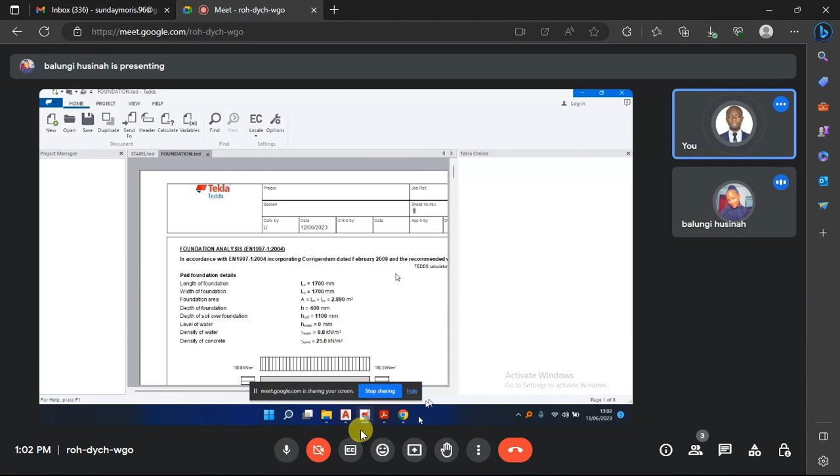It was 1.7 by 1.7 by 400, right? Yes. So we are going to see how we can sketch it and the important aspects when you're sketching it. Okay, I'm going to share here and you see my screen.

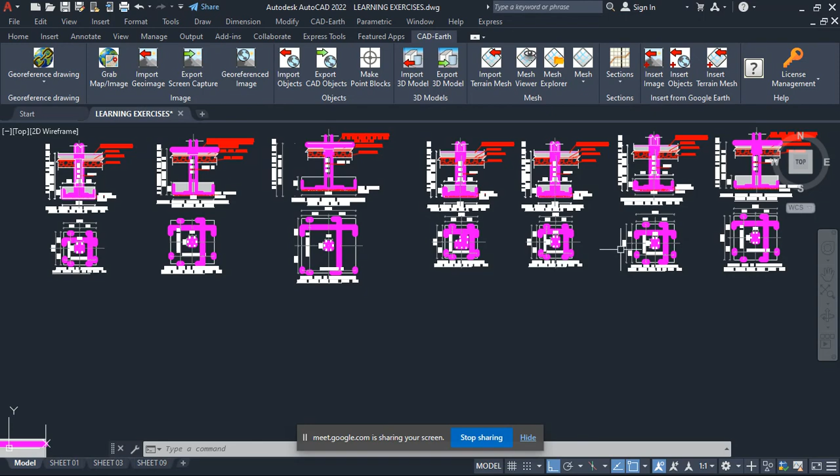Now when we are sketching a pad footing, of course you have to show the plan. For this case, I think I had a 1.6 by 1.6, I don't remember. Let me use this one. You need to have a plan, this is like length and width.

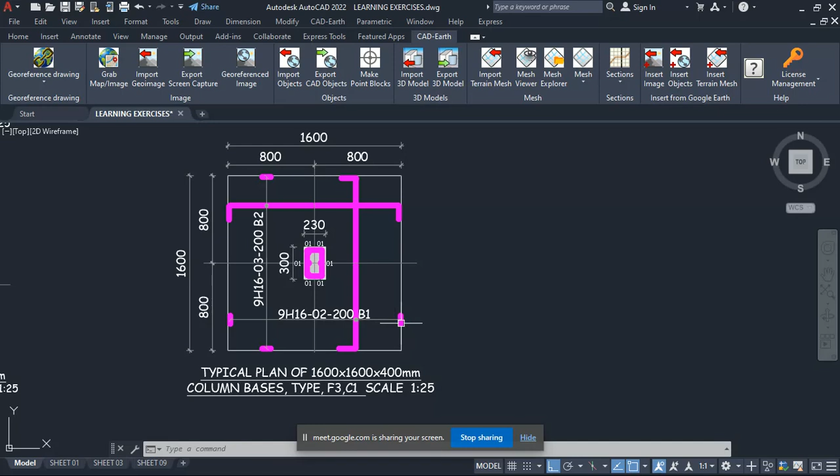So you need to show the main bars. The main bars are mainly the ones which are bottommost, that is B1. Now ours was showing T12 at 175, right? Yes, but mine I have T16 at 200. So T16 at 200 is more stronger than T12 at 175, right?

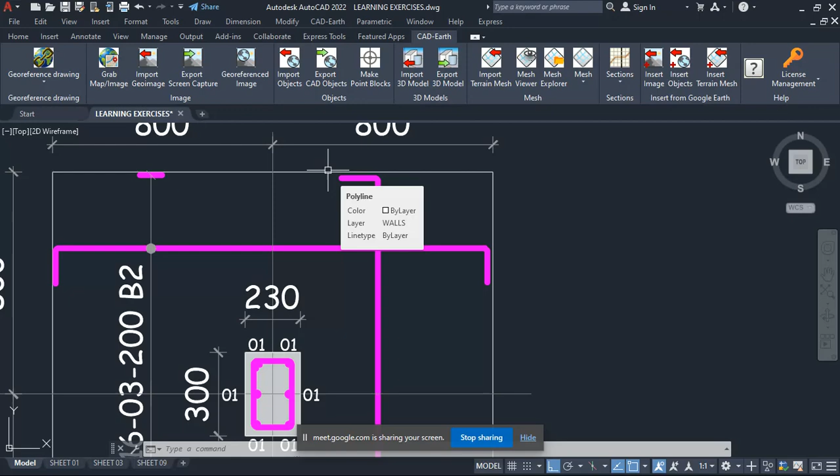Yeah, then another important thing is the hook. Now the hook should be at least half the thickness of the base. At least. So if your base is 400, at least it should be 200. This distance here, I don't know, sometimes I just sketch far, but it should be at least 200. At least half.

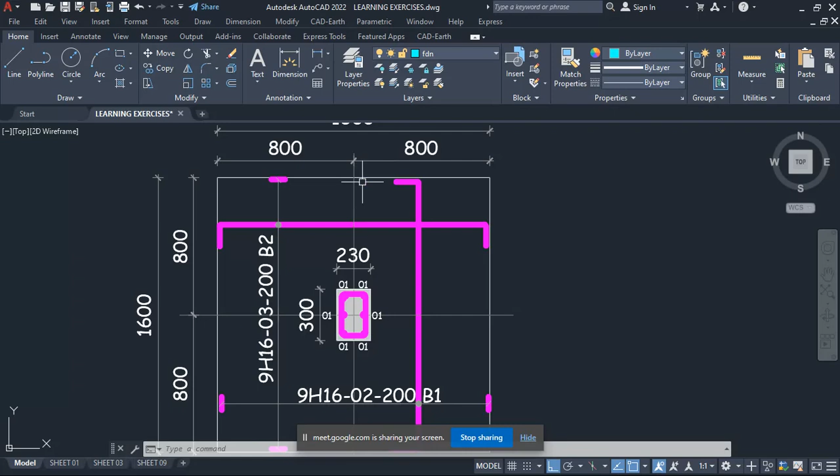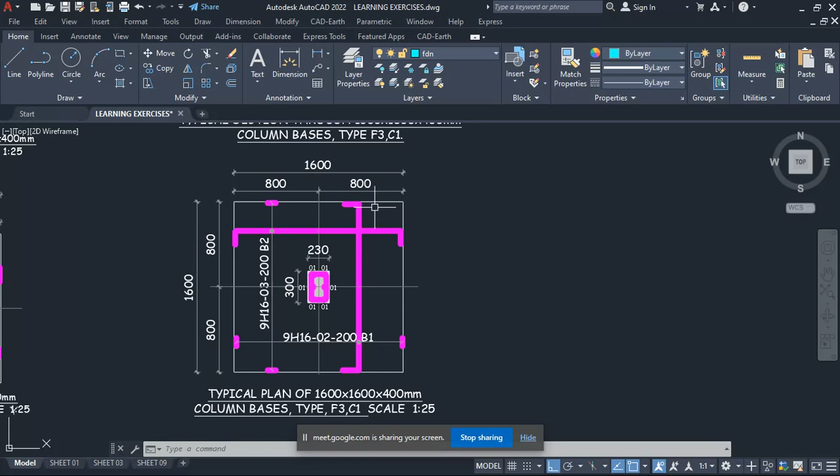Or if even possible, you can make two thirds. What is two thirds of 400? It is around 260 something, yeah? 260. So if you have like 275 or 300, the better the hook.

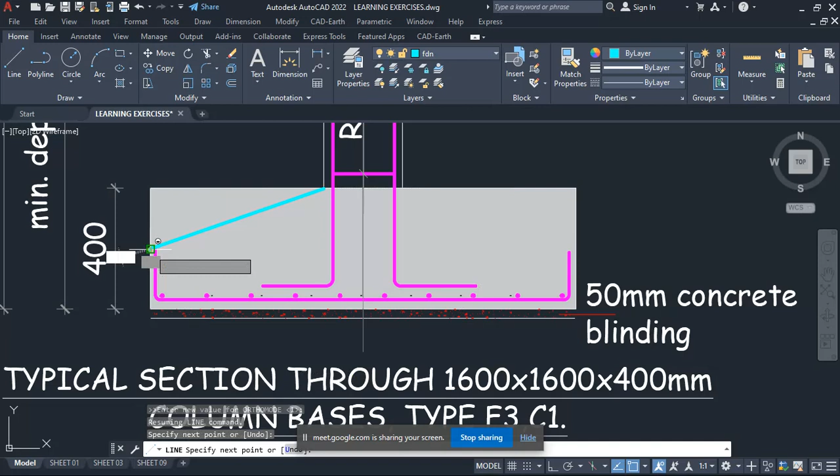Because literally, how do the forces transfer? Literally, your forces on reaching this place, they transfer like this. And sometimes when you have a thick part, you can even design it like this, because most especially this upper part doesn't hold much, unless it is double reinforced.

So that's why we need to have a hook at least which is like two thirds of the depth.

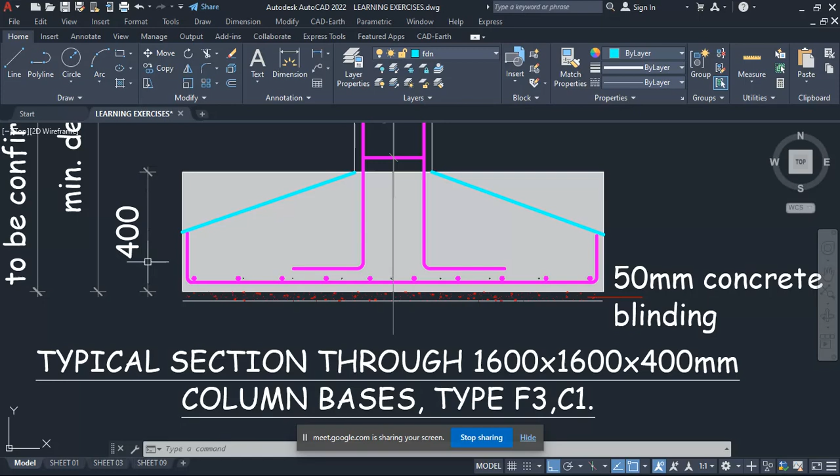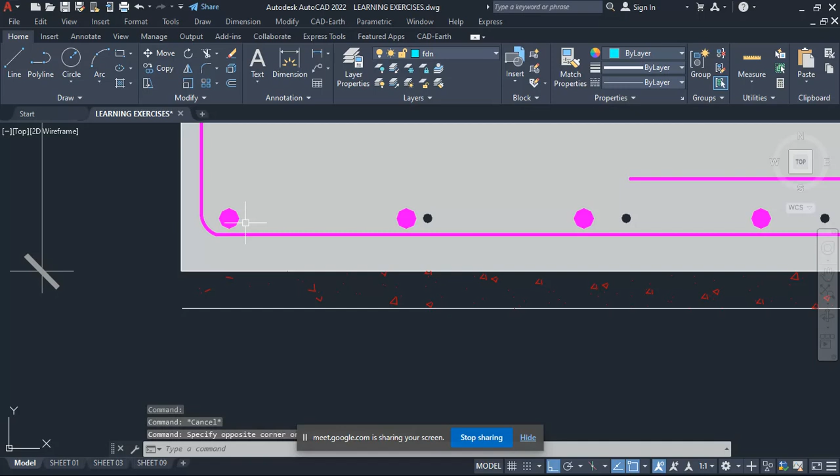Then the spacing is also important. If you're saying at 200 and your base was 1.7, you have to make sure that this is the bottom bar. Then you make sure that these bars, these are the secondary bars. They have to be at a good spacing. So if it was at 175, then it means they also have to be many.

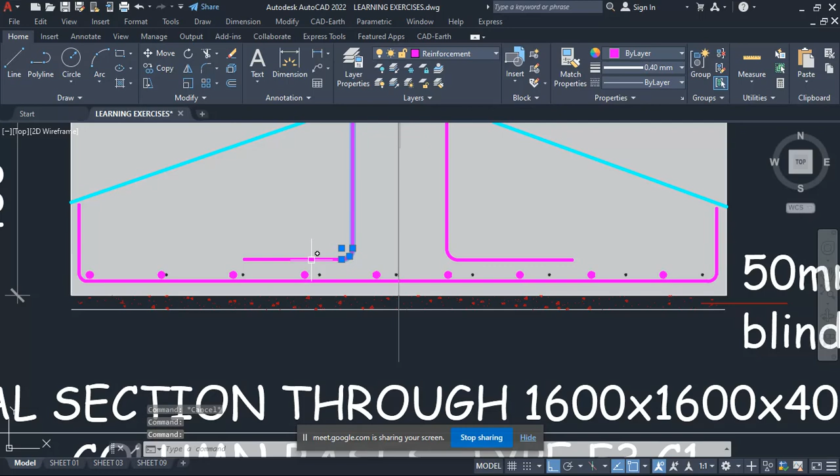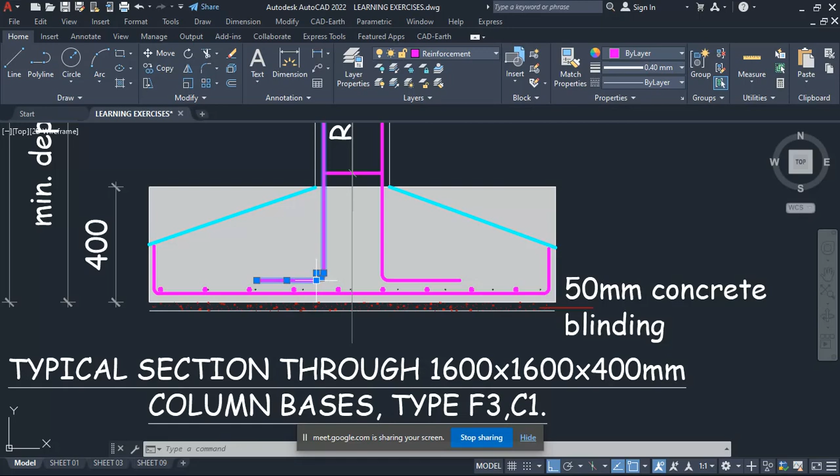Then another thing, of course, you have to show the starter bars. These are the starter bars of the column, which also need the hook here. When you check in the curtailment details in Eurocode, there's a minimum distance they show, which I don't remember properly. But as a rule of thumb, it is always minimum 300.

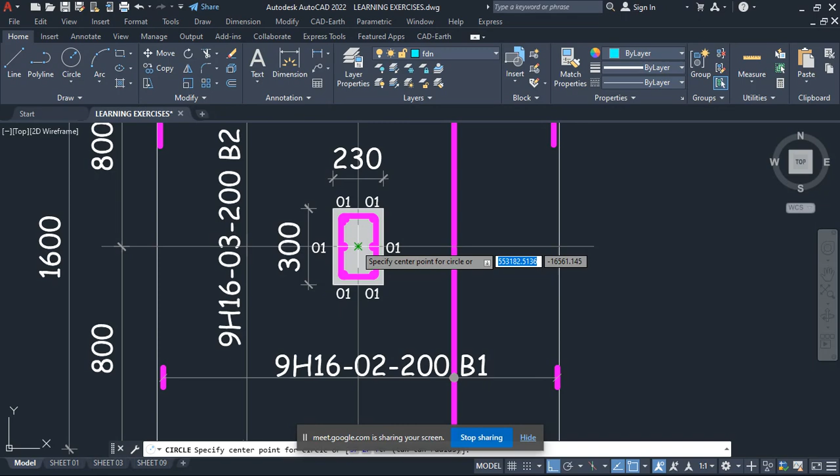Because it should exceed the punching diameter. You see, the punching shear here will operate within an area like this. When you check the punching shear diameter in the calculations, I don't know if that Tedds gives it. You try to check whether there's a punching shear diameter. So the hooks should at least exceed that part, to try and distribute the forces.

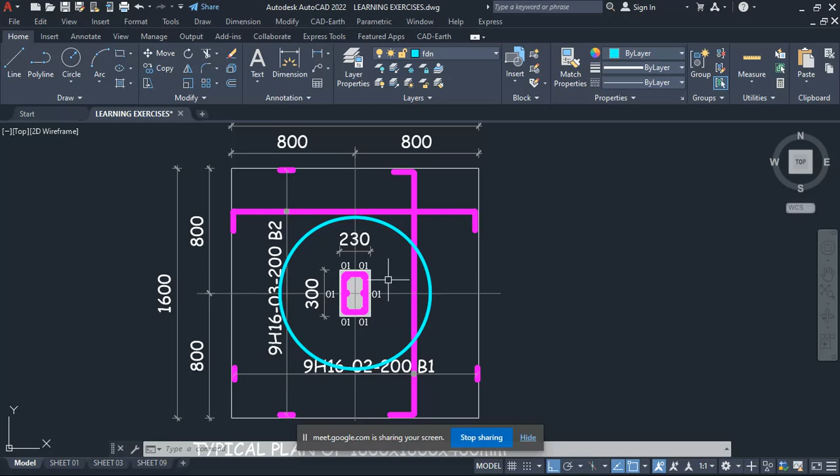Then of course you have to show the bar mark, what this is - bottom 1, this is bottom 2 - and the dimensions. Then even down here you have to indicate it properly, say it is a 1.7 by 1.7 by 400.

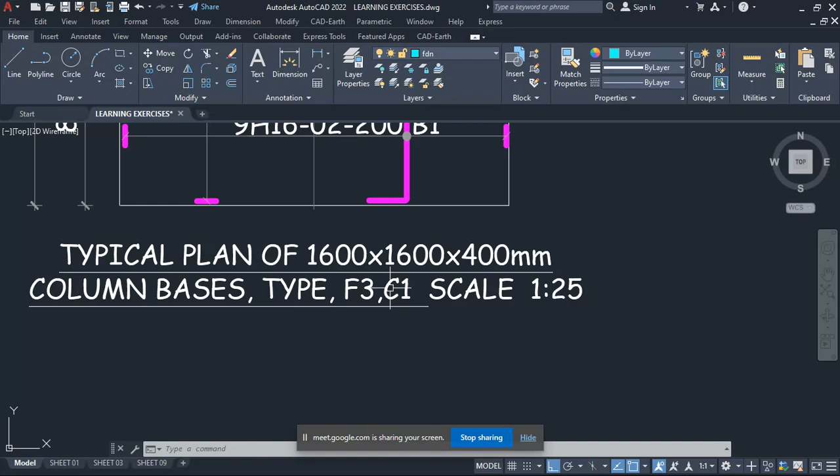Column bases footing, say it is abbreviated as F, say F1 C1. For our example, it was this one - F3, because we were designing this one, it is this one that we designed. It was F3, may have it as 1.6, but for us it was 1.7. So you also name it properly as F3 C1, C1 meaning it is column 1, which we had as 6 bars.

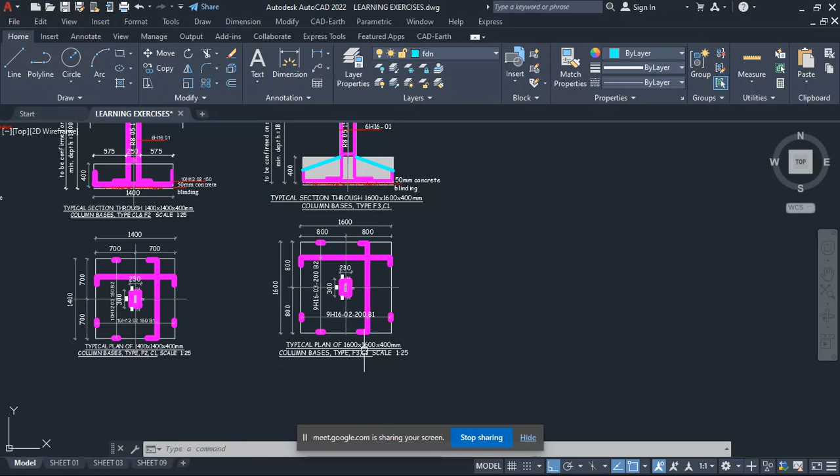You can see the section also, the way I had looked at it earlier. And here in the section you also show that it has to be a minimum depth. Now mine is at 1.8, right? So maybe the minimum they recommend is 1.5, yeah?

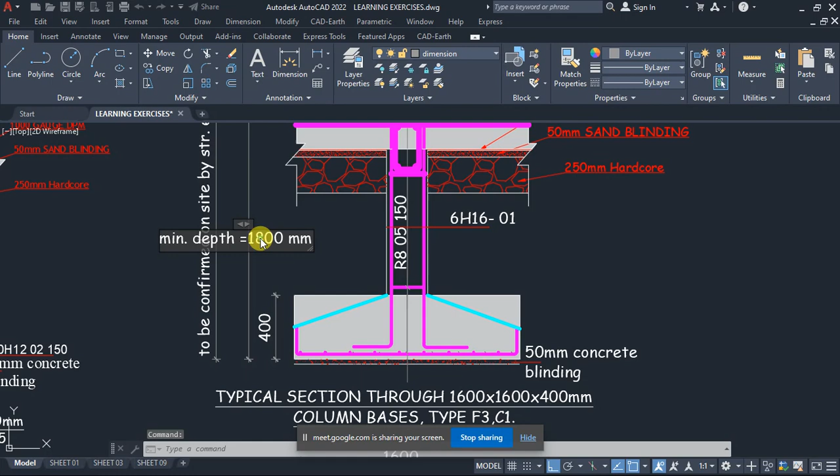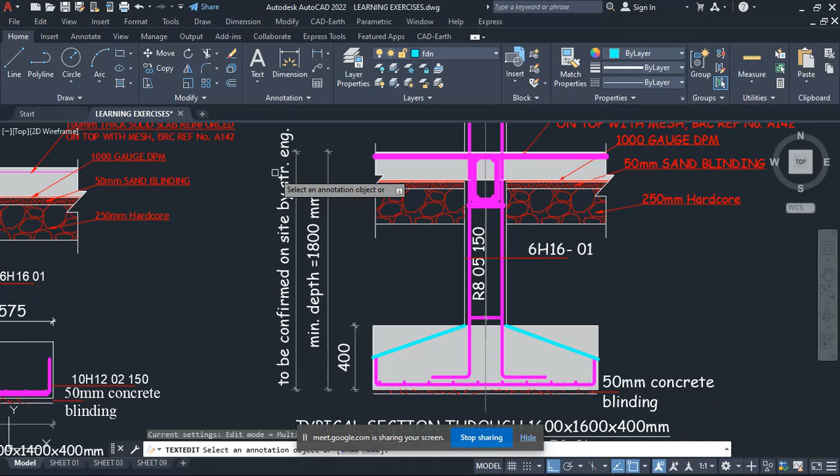Because at least it should be on hard soil. We don't know the site specifically, but if we had a geotechnical report, it would tell us at 1.8 what is the bearing capacity, and we can clearly confirm. That's why you see I'm putting it to be confirmed on site by the structural engineer, because we don't know whether even at 1.8 we shall establish a hard ground. But if you're sure, you can specify.

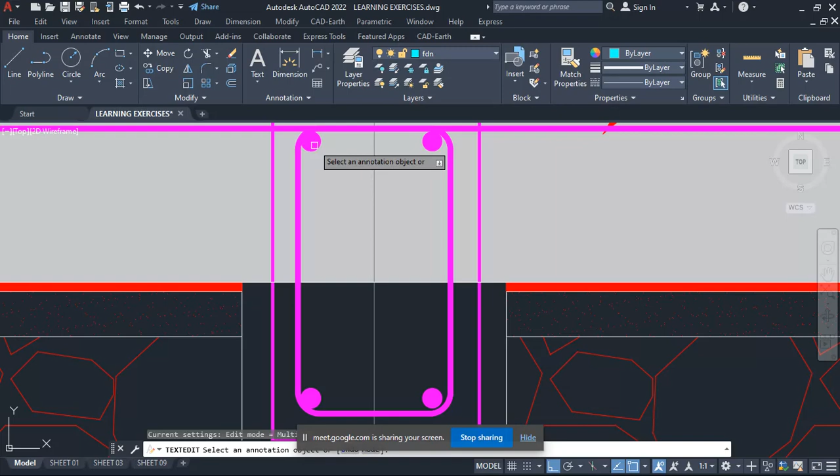So in your section, you also have to show the ground beam. We have a ground beam somewhere which links these columns together to try and reduce settlement. Are you seeing it? It has 4 bars with links somewhere.

Of course, these are the slab details with hardcore, with sand blinding. From the sand blinding, you have a DPM sheet to prevent water coming up. Then you have the slab.

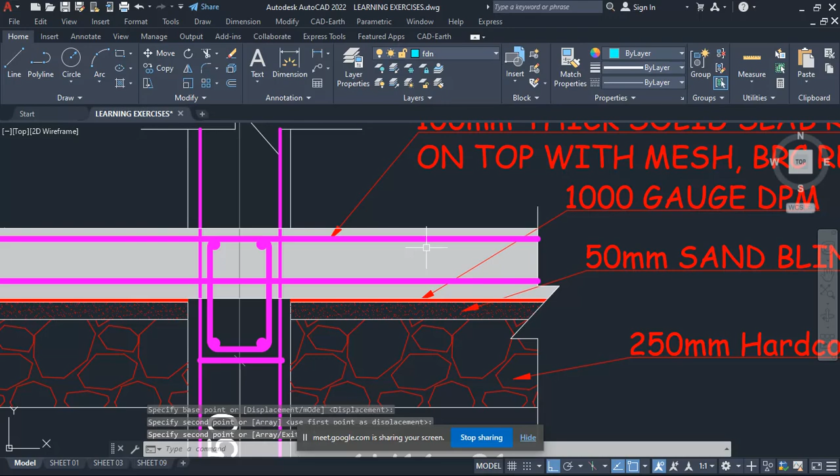First with BRC. The challenge I've seen on ground, in most cases people in the field end up placing it below. But the main purpose of BRC is to reduce cracks in the slab. So the BRC should be on topmost with a cover of at least 25 or 30, not below. It should be on top of these beams to reduce the cracks on the ground.

So sometimes the practice in the field is very different. People, you find it on the ground, sometimes even without spacers.

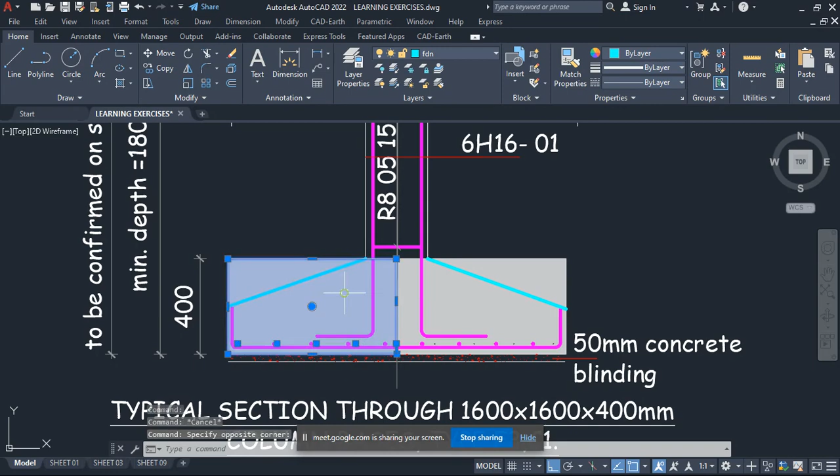So literally this is how you have to sketch. This is the hatching, and this is just another layer for reinforcement and another layer for blinding. So it is just normal 2D sketching. Literally that's how we sketch it, and I'll share with you these files.

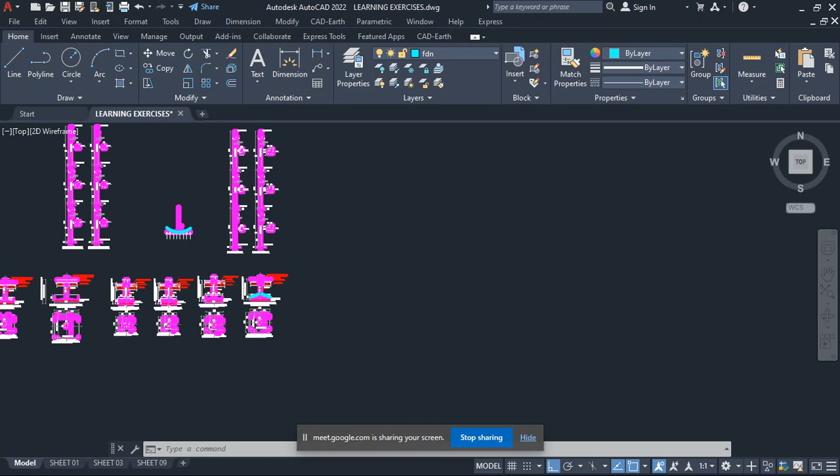The fact that we have looked at most of the things, I'll share with you so that you can try to sketch and compare, right?

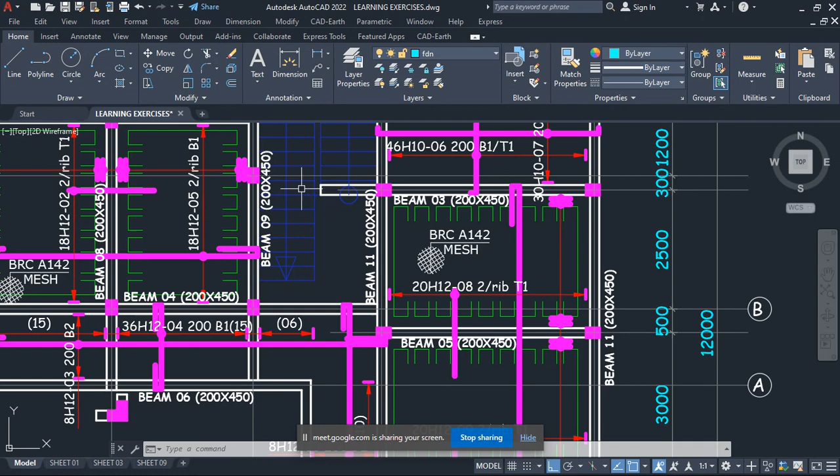Okay, we have looked at the column, we have looked at the base, we have looked at the slab, 2-way, 1-way, we have looked at the ribbed slab, we have looked at the staircase. We have looked at the beams, and now the foundation.

So I'm going to share with you this project. For your practice, when you try to do a layer and it disturbs you, you can always match properties.

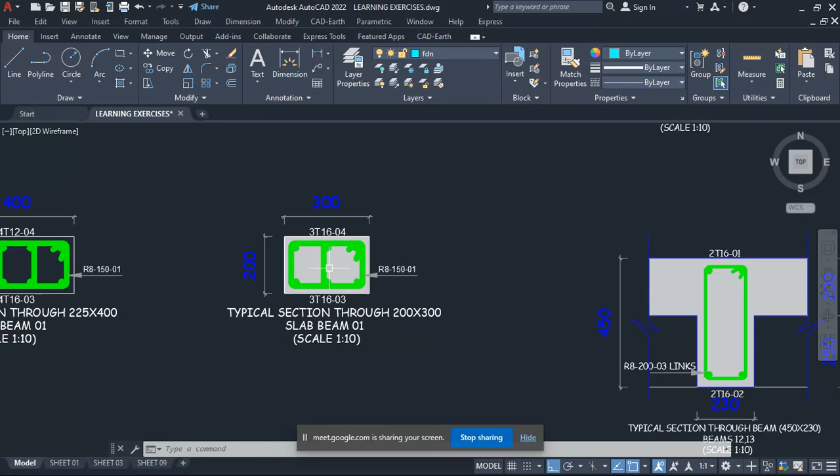That's how I started using these templates. Sometimes they are not mine. For example, I want to sketch this bar and my layer cannot come out properly, I'm just showing you an example. So if you already have this file, you can always work in this file as a template.

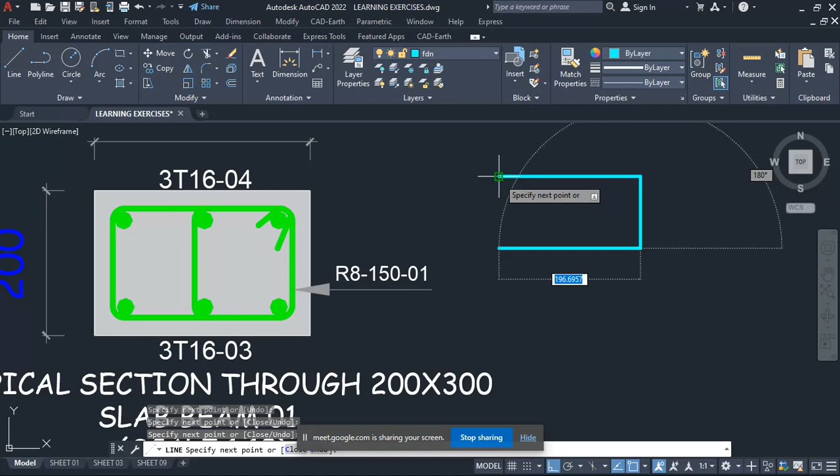Yes, I do, I do. You can always work in this file and copy some of the existing layers. And for example, here I want to copy this reinforcement.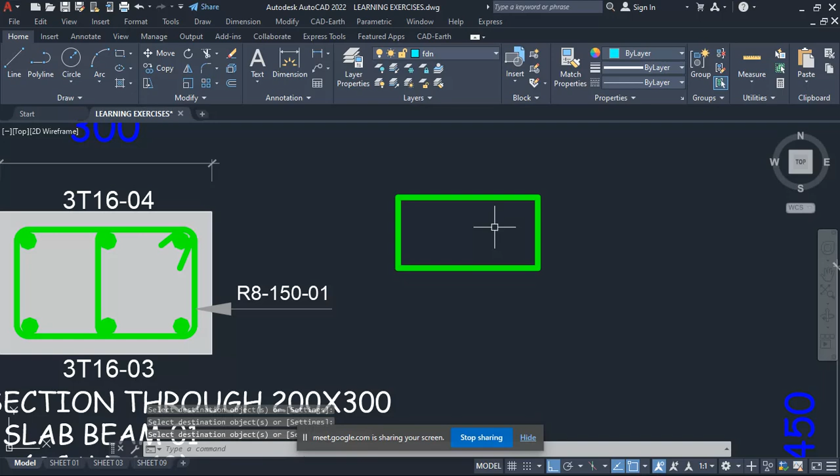I can just come to match properties. I click on the reinforcement and I click here. You realize that my reinforcement also changes to match this one. So sometimes if you cannot generate these layers differently, you can always match.

Maybe the cover here is 25 and I want to do the external. So matching properties is one of the things that I found in AutoCAD that helped me so much, because when

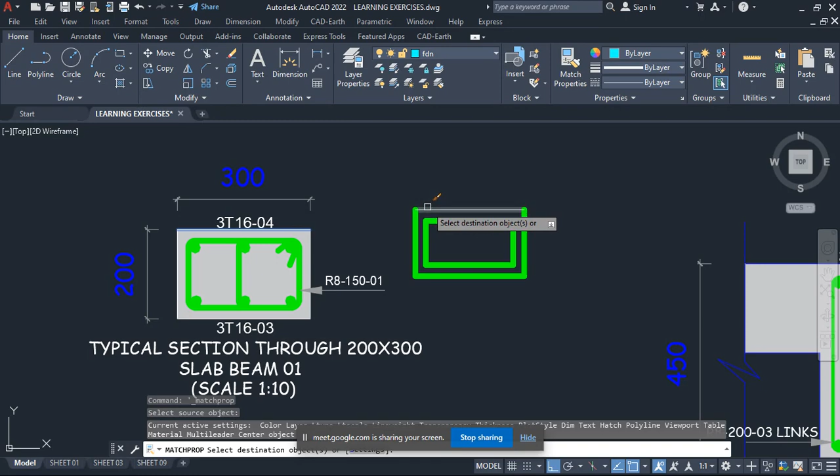you're starting to detail these things, sometimes they don't come out the way you want. So with time you can generate your own layers, but for the start, you can always copy the ones which are existing, and you realize how they change. So assuming you are sketching this thing, you can easily come up with something similar with ease.

We looked at the rib slab. I think for a reinforced concrete structure, this project covers most elements. So I'm going to remove anything that has nothing to do with this project, then leave only everything for this project.

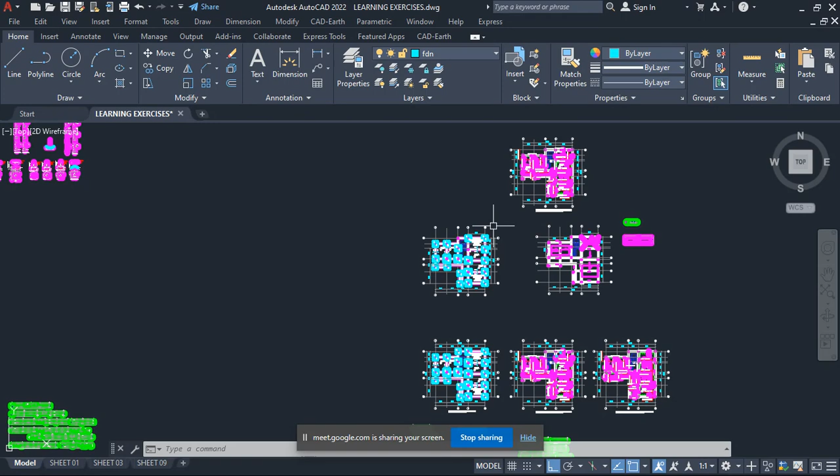Something we didn't look at here, we have to look at these sheets, it is very important. The sheets, I've been trying to actually learn them. How do you come up with the reports and everything? How have you been trying?

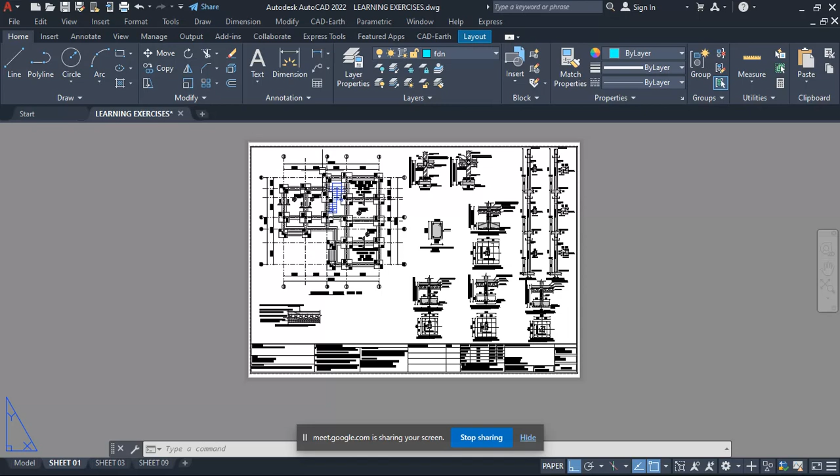So first of all, you need to change your sheets. When you right click here on the sheet name, and you come to page setup manager, page setup, that's why you choose, say this is sheet 1, and maybe you want to modify it. That's why you choose the plotter.

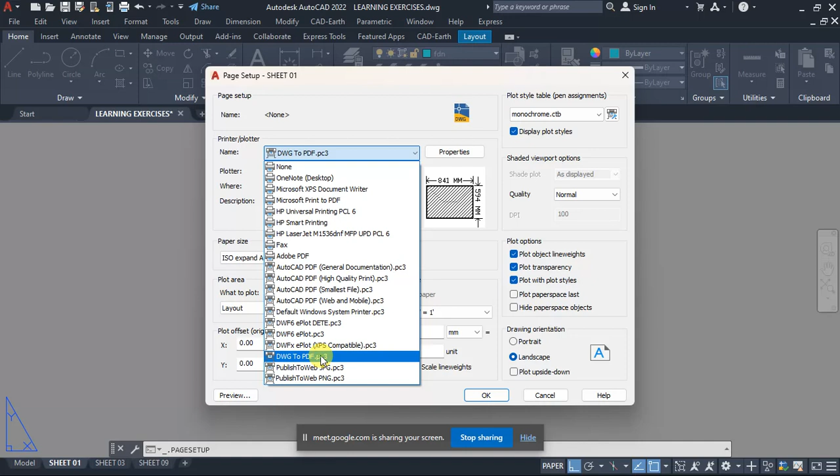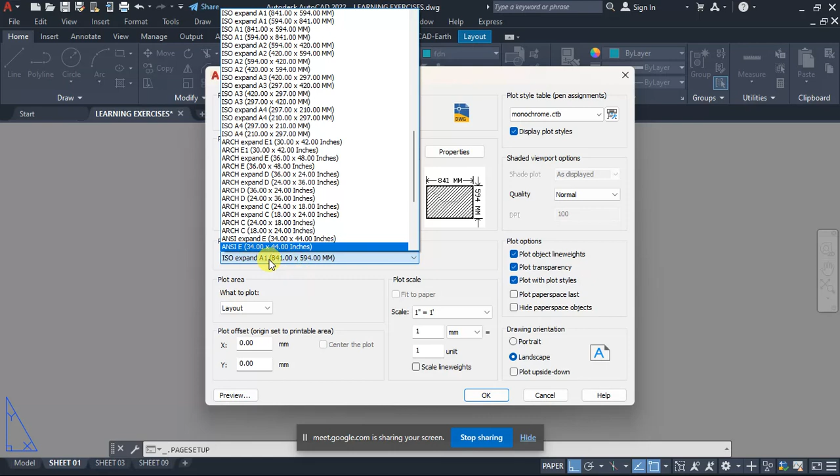Me, I used to DWG to PDF, because in most cases I want to print them in a PDF. Then the page, in most cases professional workers will print on A1. So if you're a person who prints on A3 and you want to work within A3, it's up to you, but mainly I use A1. That's why you see I'm using ISO expanded A1.

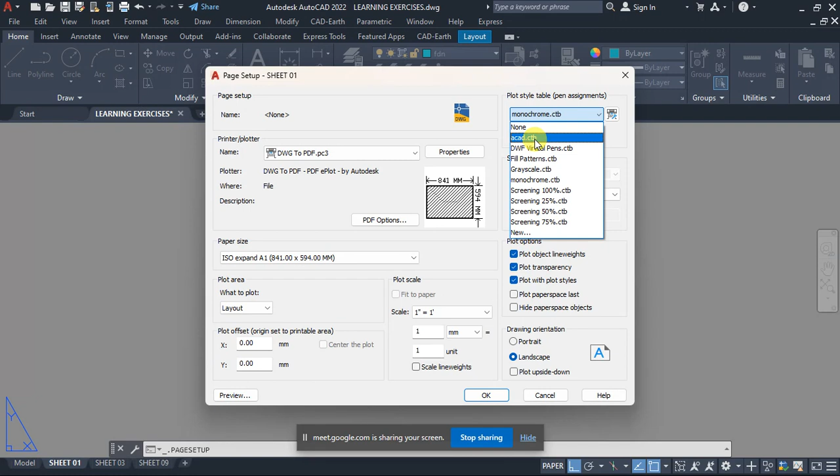And what am I plotting? I'm plotting a layout. Some people can plot a display, but in most cases I want to put things in my layout, then print at once. Then here the plot style, for professional work we normally use monochrome CTB. And if you want it colored, you may be forced to choose acad.ctb for it to come in its original colors.

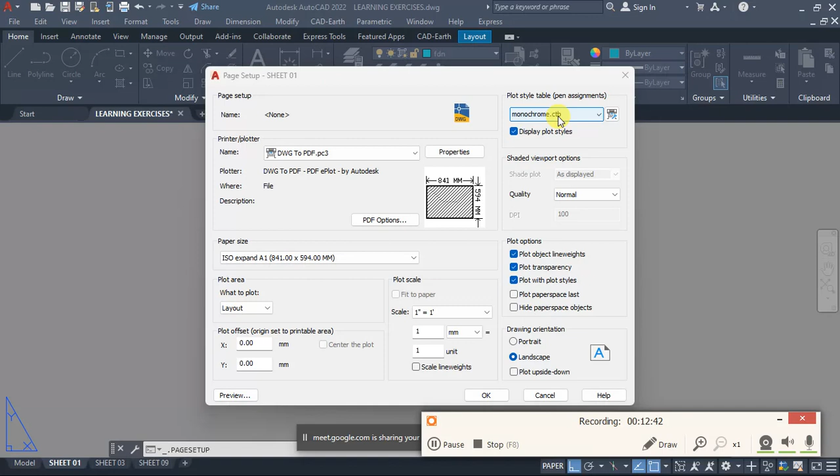So now we choose monochrome CTB. I've explained to you, if you want to print colored things, you can use acad.ctb and try out all these ones. But for professional work, we normally do blueprints, and we only want it in one single color.

Now the quality, if you want still good quality, you can do maximum. But the more you do maximum, the more your file will be heavy.

Then on plot options, plot object line weights. Now we want to have different line weights. For example, a bar is more thicker than an imaginary line. So if my reinforcement has a line weight of 5mm, I still want it to be visible. Plot transparency: if I want my hatching to be a bit transparent, I also want it to be visible.

Plot with plot styles. Plot styles are like how you see calligraphy. You want it in Times New Roman, you want it in Calibri. So the way you want it, that's how it will appear.

Hide paper space objects. Sometimes you have things in the paper space, so you can always check out these ones.

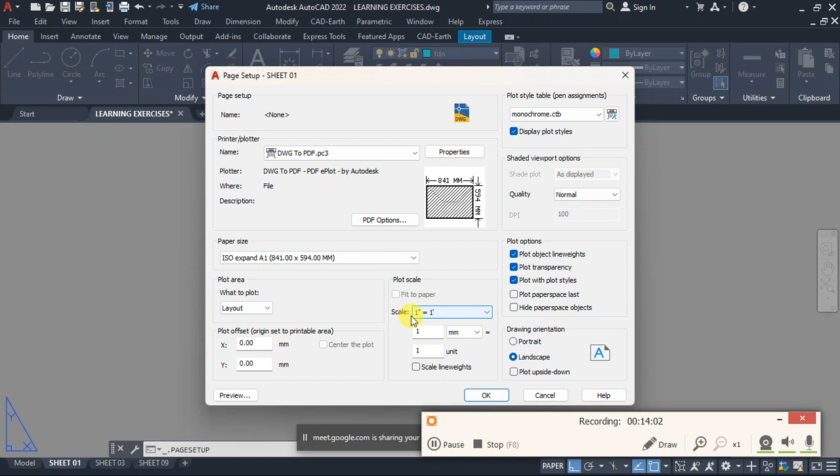Then portrait, landscape - these ones are obvious. Scale 1:1 means we are printing it the way it is, the way it is on an A1 sheet. So if you're done setting your page, say okay.

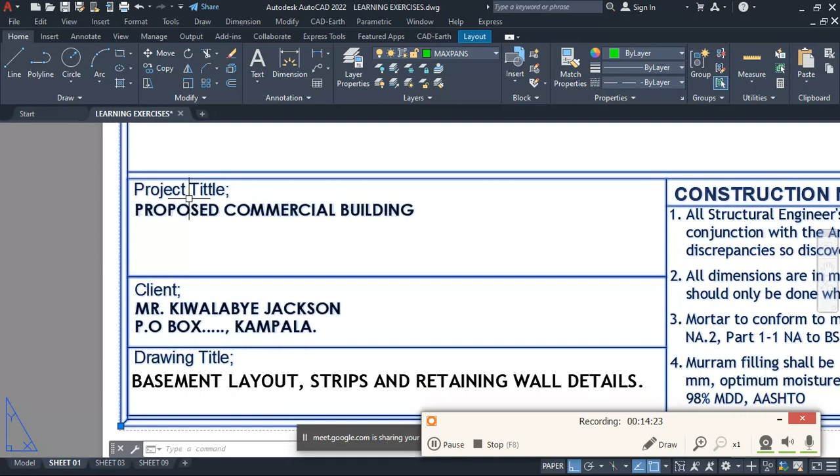Now, for my sake, I have a template I use for my projects. This template, I just edited it and made it a block.

So if you want to edit it to customize it yours, you can double click. After double clicking, you come to this one, you say okay, this is the name of the block. So you'll come where it is and edit it to what you want.

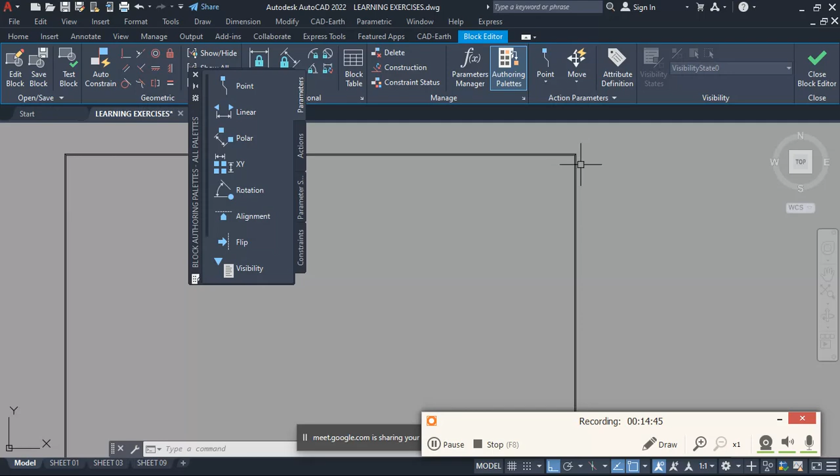Maybe you may want your things to come on the vertical, so you can draft it here. After drafting it and changing it to what you want, you close and save.

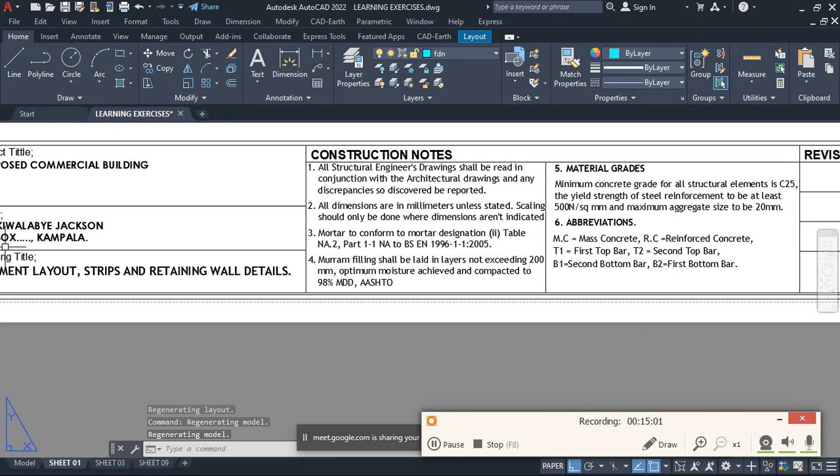So when you save it, it will update. You will not see the way I have it here - you can customize it to what you want.

Then if you're creating new sheets, don't create from a fresh sheet. You can always copy it, maybe move it to the end, and create a similar copy because you don't want to lose your template sheet. Then you can always rename the sheet in case you want it to have a certain name.

Then about fitting them within the place, the viewports have their own layer. It is called the viewport. So if you want to zoom things, you untick it so that it is visible. Are you seeing it now?

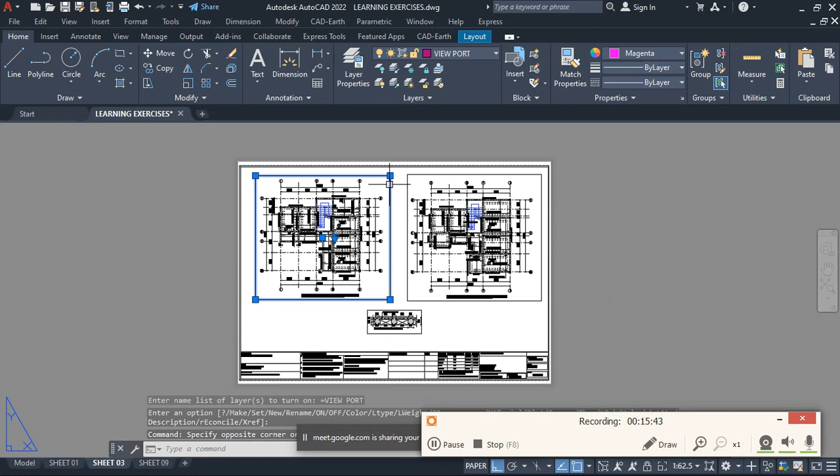Yes. So here you can double click inside and you'll see the scale. This one is 1:62.5, down here.

But now plans from a scale of 1 to 100 and below is okay. So you can even have it 1 to 100, 1 to 50.

You can see the different scales. I might change them sometimes to these points just because sometimes I want something to be visible. But you could make it say 1:65 or 1:75. Where is 75? I don't see it here.

It is here. How did you make the viewports visible or not visible? You can turn it on and off from here, from the layers. It has a layer called viewport.

In the layers, you type in V. Are you seeing viewport here? Yes, I am.

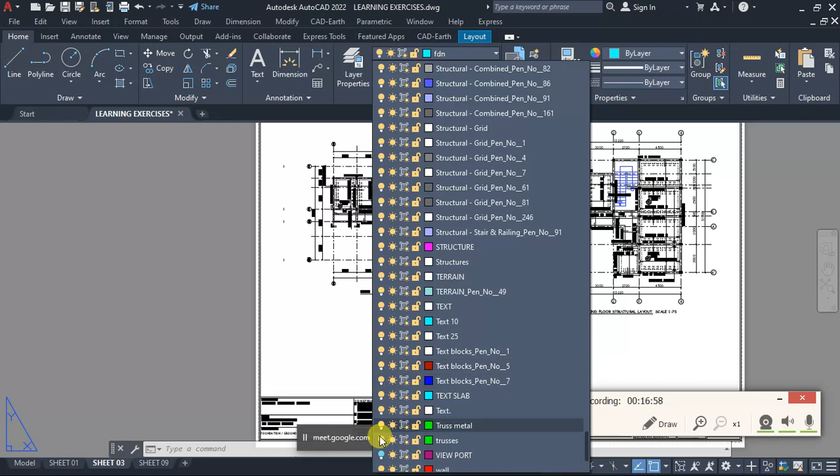So when you turn it off, it goes off. Now when you want to print, you turn it off so that nobody can see it. If you want to adjust your things, you can turn it on and adjust your drawing to fit within what you want.

Okay, now when you're ready to print, you can turn it off. Viewport, you turn it off so that you only have the drawings.

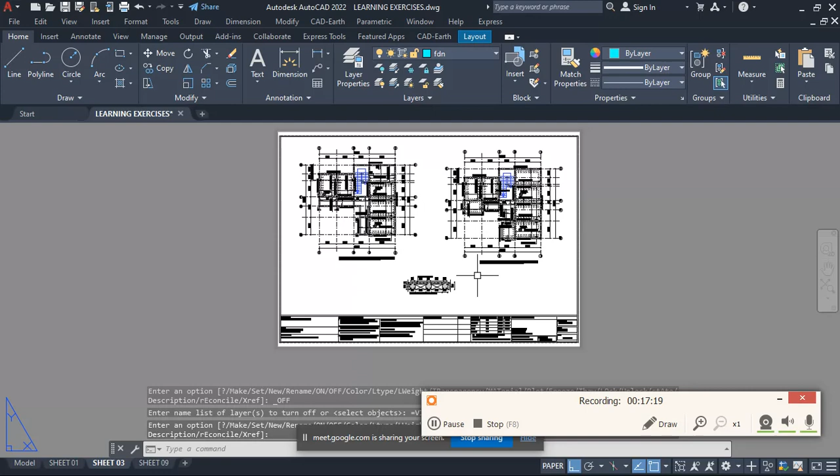Now in most cases, sometimes you have more than one sheet and you want to print them all together. So if you have already arranged them this side, you can come this side to print, to file, or to this capital A, then you come to print.

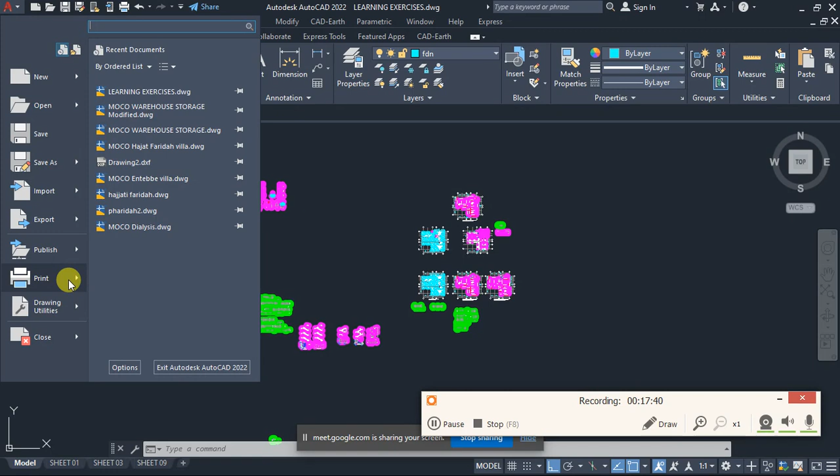From print, you can do a batch plot. Batch plot means you're plotting more than one sheet.

So here you will remove this model, you delete it. You choose where you want to save your finished file. Let me browse, maybe I want to save it in Balungi. Your folder was somewhere here. Balungi, yeah, structural, I select.

Now, here these are the settings. The more you want it to be clear, the more you increase the quality. You can increase the quality from here. But the more you increase the quality, the more it will delay printing.

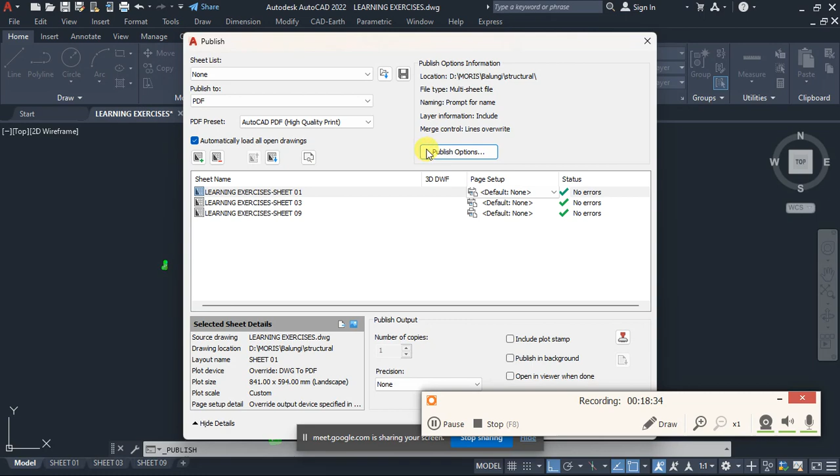Then you can say okay. So after choosing where you want to save, the main thing is you publish. Now you have the 3 sheets - sheet 1, sheet 3, sheet 9. So you can come, but you have to choose also the publisher.

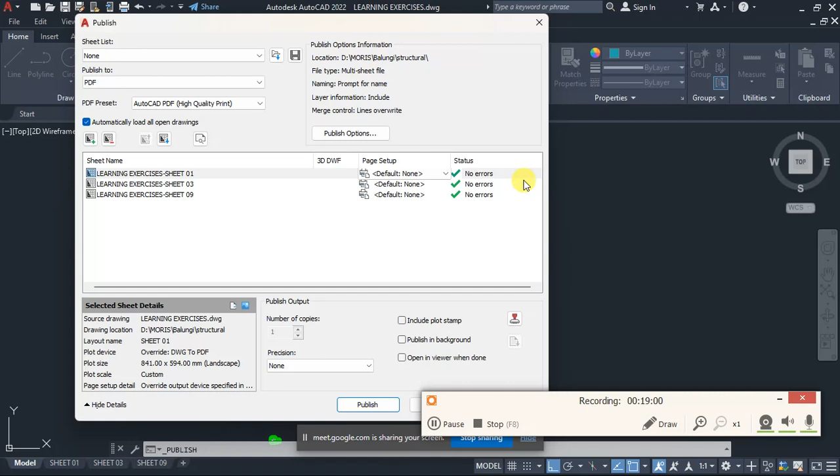We want to publish it to a PDF, so that from a PDF we can always print anytime. The printer we are using is AutoCAD PDF, high quality print. So it will print the sheet the way it is because we already set the sheet. When you're done with that, then you can say publish.

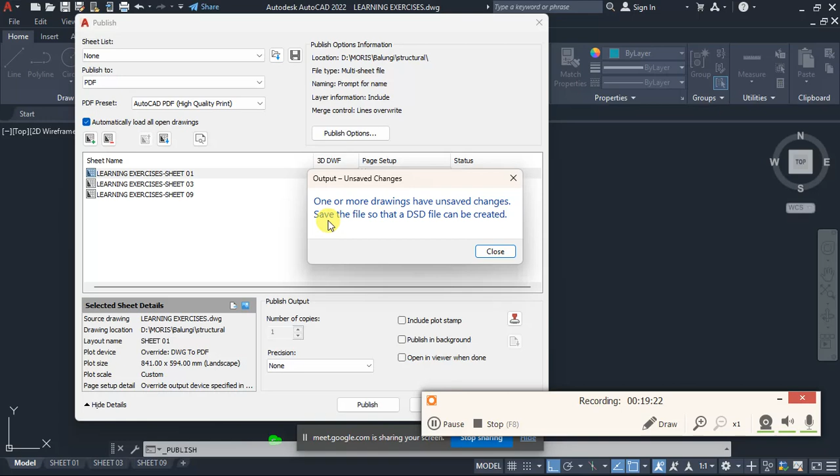It will ask you to save again in that same place and give it a name. You can give it a name - mine is learning exercises. Then save. One or more drawings have unsaved changes, save the file to DSD something. Just say close. So now here it is printing the sheets.

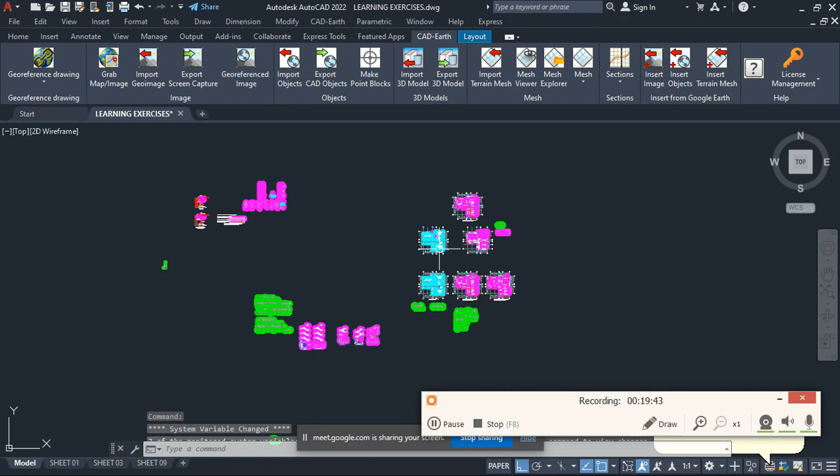When it is done, it will tell you complete. So you have to leave. Depending on your machine processor speed, some computers will delay there, some will hurry. So now it is done printing. You can see plot, publish, complete.

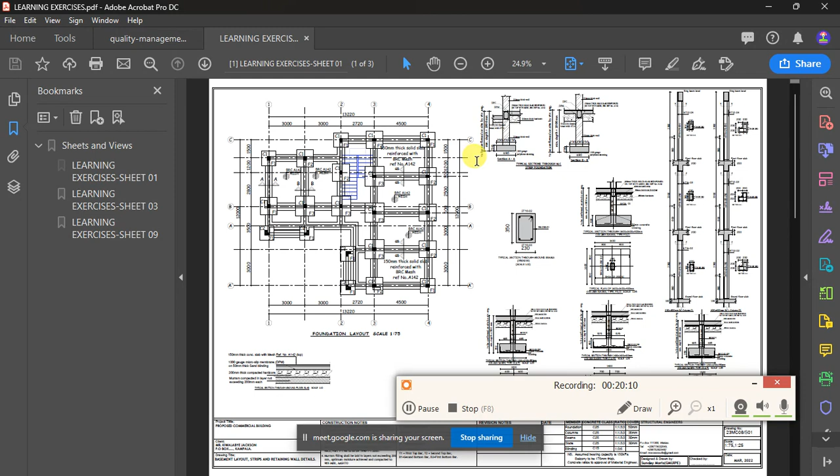So from there you have to go where you saved it. Mine I had saved it in your folder, the one we are using for learning. Structural - it is here, it is a PDF, and you can see that our drawing is ready for printing, with my title page down there.

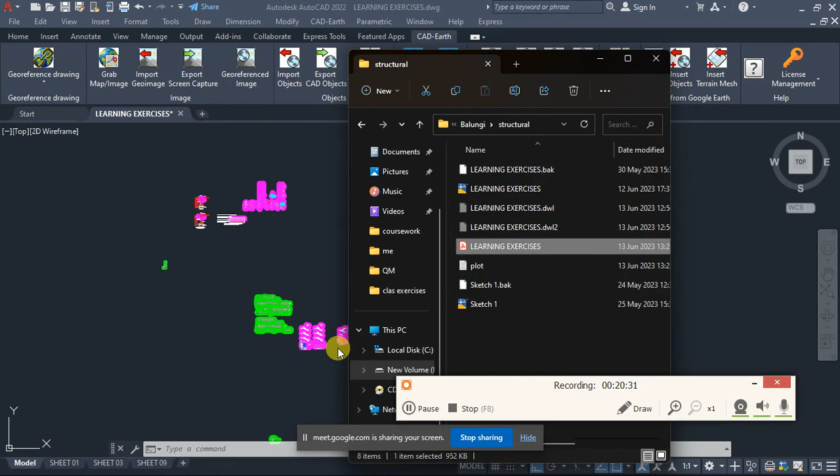So at this level you should be able to print a structural drawing and give it to the client, because now you have all the necessary parameters, you know how to analyze, and you have to improve your skills of sketching in AutoCAD. You will zoom in and see all these sections.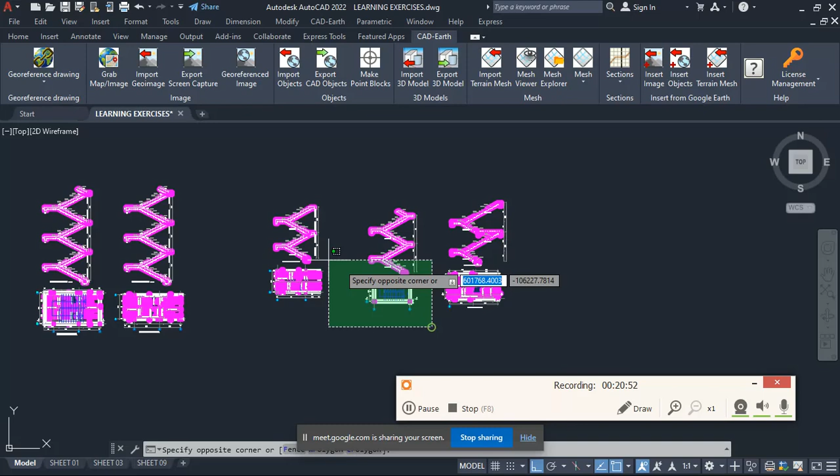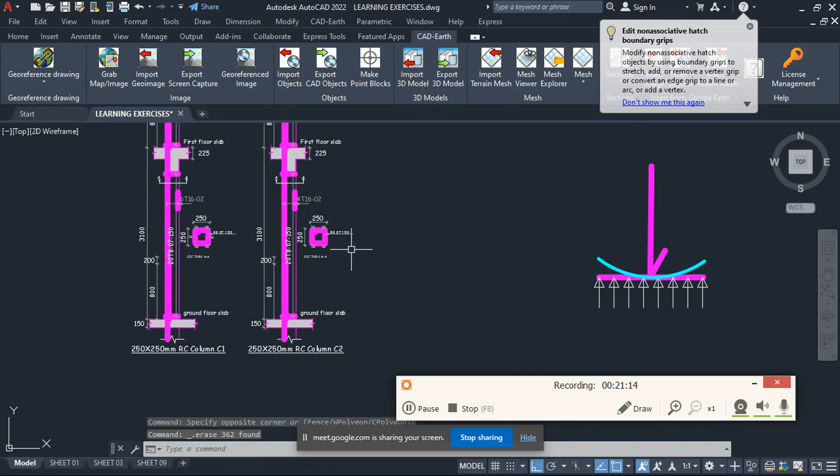Only that I can delete what was not part of our program - I think this staircase was not necessary. Just so it doesn't confuse you, so that you remain with only what we did in this course. We had F1, F2, F3, F1, F2 - I think some of these are irrelevant. Hope I didn't delete what is necessary. Yeah, I didn't, because still I'm seeing our work is still intact.

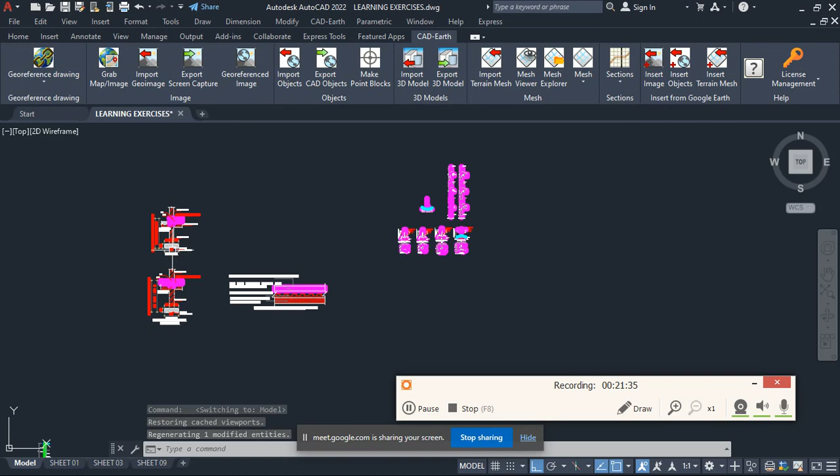So I'll share with you this file. You can always edit these things, and there's no problem even working in the same drawing. If you're going to start a new project, you can always save as, and you will still work in the same thing, but you save it in another file, so that you can copy some of these things for your sketchability.

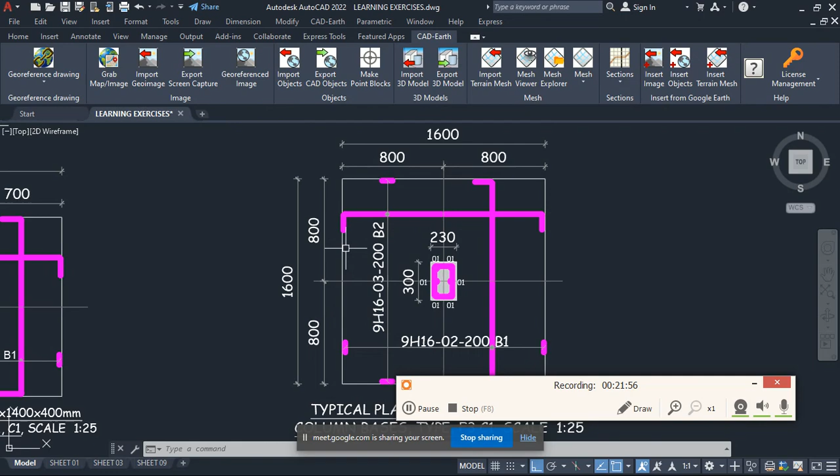So I think, unless there's any question, now we have done some reinforced concrete structure. No, I'm okay, I just need to learn a little bit more of the sketching in AutoCAD, because I'm still having more issues of sketching. But I wanted also to take you through Prota.

So our next session, I think we need to start on Prota, but at least now you have some idea on Tedds. And you can always - the process is always the same: generate loads, apply on the member, and analyze it. Okay?